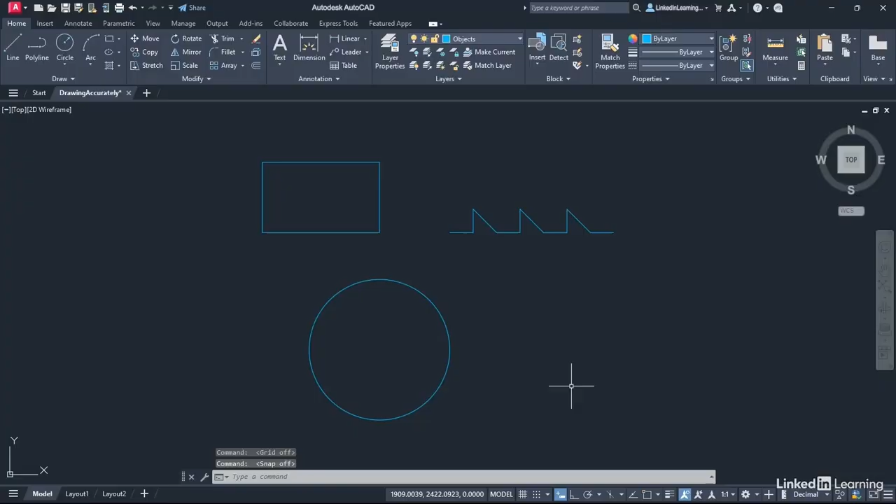Now, we're just going to do a little bit of housekeeping before we start using the coordinates in our AutoCAD drawings. First thing we're going to do is turn off snap and grid down here. So there's snap and grid, turn them off. They go grey on the status bar. Select the circle that you would have perhaps drawn earlier, and then right click and erase on the shortcut menu.

Now, we're going to draw a small circle on the end of this line here. So we're going to go up to the draw panel, click on the flyout, center radius for the circle, just pick a point on the end of that line. Now, at the moment, it's not snapping to it. That's because we need to come down here. We need to switch our polar, object snap tracking, and object snap back on.

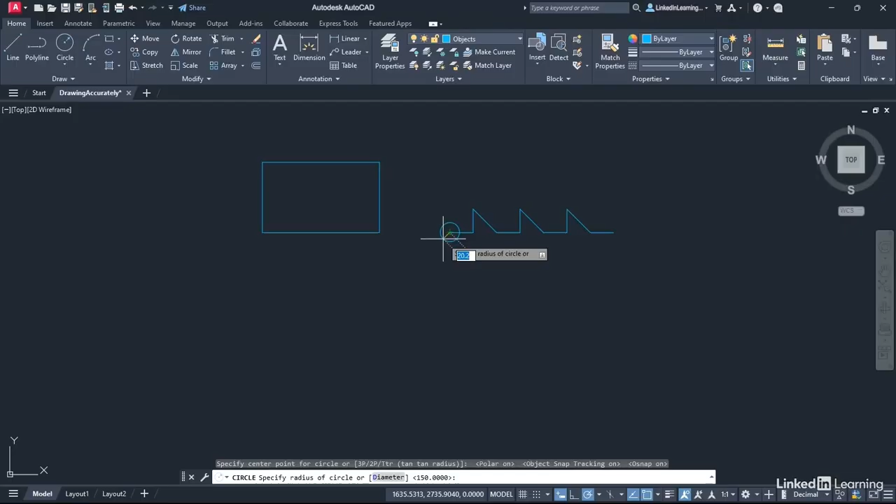Then if I hover there, can you see we get an end point? Left click. Just drag the circle out a little bit to about there, click there like that. There's our circle in place. Now the lines we don't need. So click on each line. You can do it individually like that. It won't take long. Just a quick click on each line. And once you've got them all selected, make sure the circle isn't selected. It's a right click and erase again like we did previously.

Now we're going to utilize the center of that circle for some coordinate entry to create a rectangle like this with 4 lines, but using coordinates only. So before we do anything else, we need to make sure that the center object snap is on. So we come down to the status bar, click on this flyout arrow here next to object snap, and we want endpoint, put midpoint on as well, and we want center, intersection, and extension. Make sure those 5 snaps are ticked.

So whenever you snap to an endpoint, midpoint, center, intersection, or extension, they will always display when you're working in the drawing. Now just click away from that in the drawing area, that menu will disappear. Make sure you're on the objects layer again in the layers panel, like so, and then go back to the line command, like you did in the previous video. And we're going to hover over the center of the circle, see it pop up, there you go, center snap, left click.

Now you can see our line is now moving freely. Grid and snap, you're kind of tied to those snaps on the grid. Now we're working in a much freer environment where we can potentially use the dynamic input there to put a distance and an angle in. But we're not going to do that. We're going to type the @ symbol. So I'm going to type @ like so. Can you see that appears on the dynamic input entry like so?

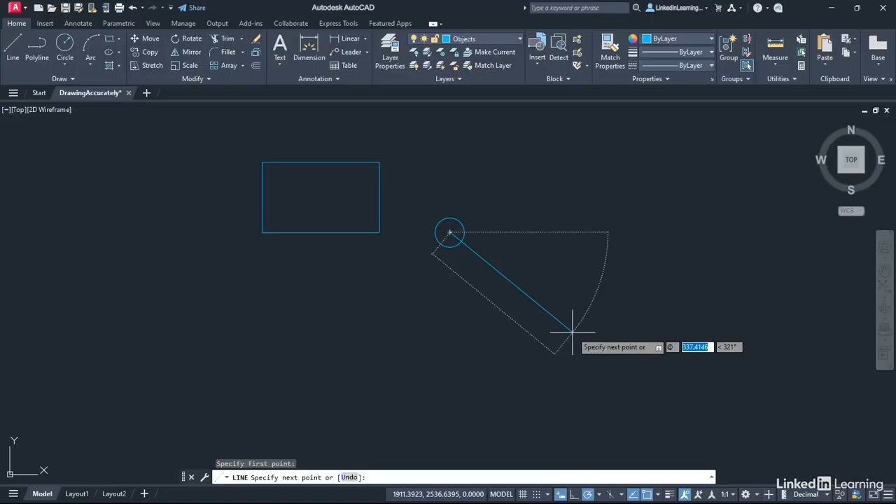And we need that to be 250 long along the x-axis, but 0 going vertically on the y-axis. So we're going to type in 250, comma 0. Now that line will go to the right because it's positive, and it will be horizontal because the y value is 0. Press enter, even though the line looks a bit weird, and you'll see there's your 250 long line. And now we're ready to come off of that segment there.

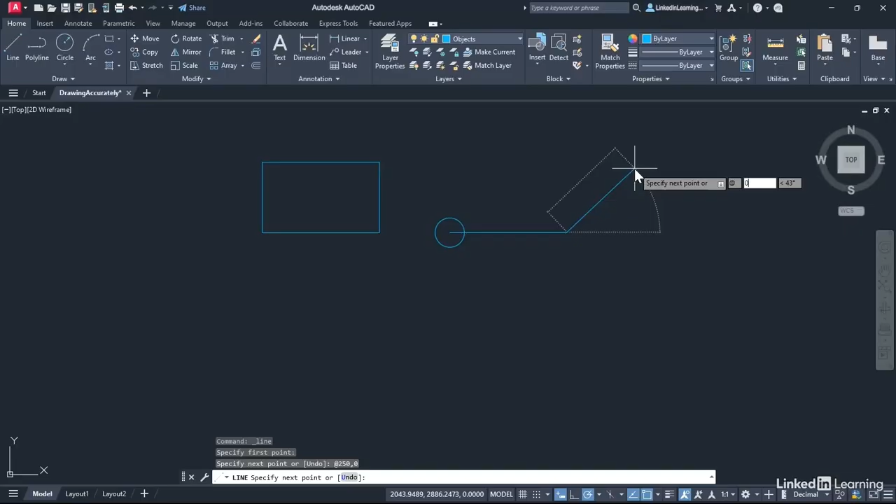Now we're going to do the same again, but we're going to use the y-axis instead of the x-axis. So this time it's an @ symbol again. This time 0 for x, type a comma, and then type 150 for the y value. So you're basically saying @0,150. Press enter to confirm. And there's your vertical line. So you've gone 0 along the x-axis this time, but 150 up in the y-axis because the 150 was a positive value. If you'd put in negative 150, the line would have gone downwards from that last point.

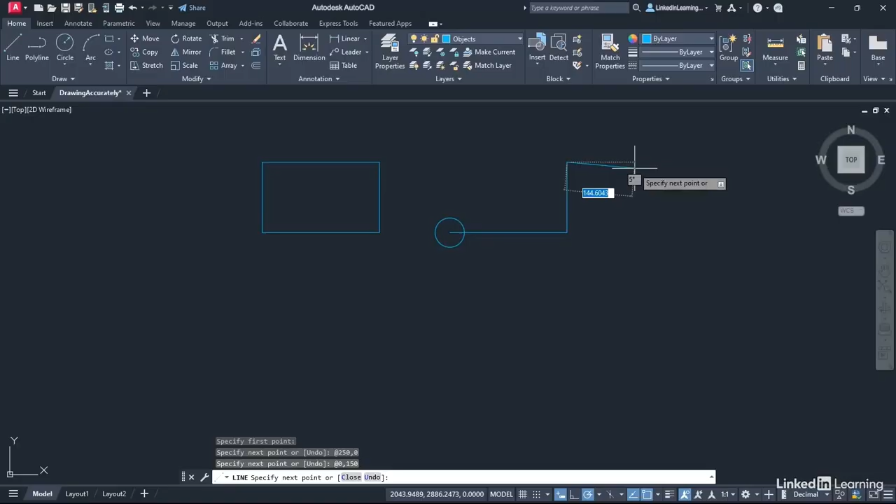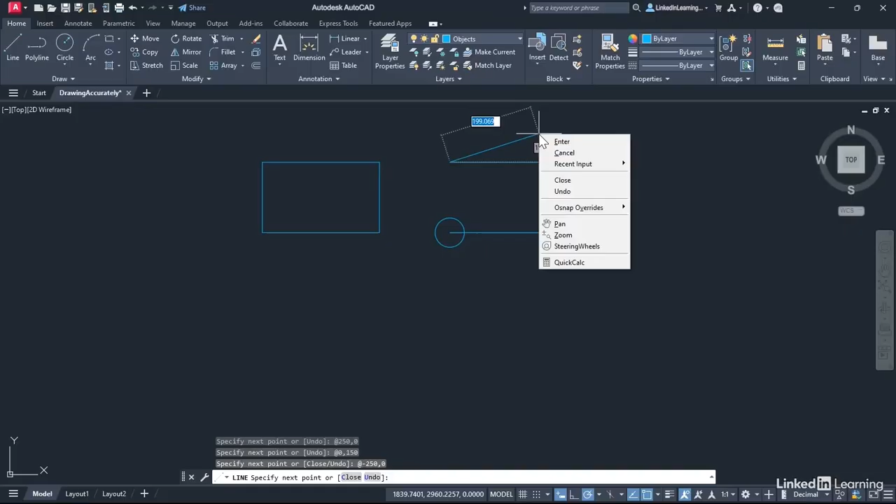So again, we've got to go to the left this time. So the x value will now be negative. So it's going to be @ again, but minus 250, going to the left, negative x, comma 0 in the y-axis. Press enter, and there we go. Can you see that's gone to the left? And now I can right click and use that shortcut menu to click on close to go to the first point. And there you go. We've created the same rectangle, but using coordinate entry instead.

So when you're using that @ symbol, that is relative to last point. It's a relative coordinate. If you were using hashtags in front of those coordinate values, that would be an absolute coordinate relative to x and y equals 0 at the origin. If you look in the bottom left corner of your drawing, can you see x and y with the little square around it? That's indicating that the origin is down there somewhere. What we've done is we've gone relative to the center of the circle using the @ symbol. Absolute coordinates, it's a hashtag. Relative coordinates, it's an @ symbol. So as you can see, fairly easy and quick using coordinates.

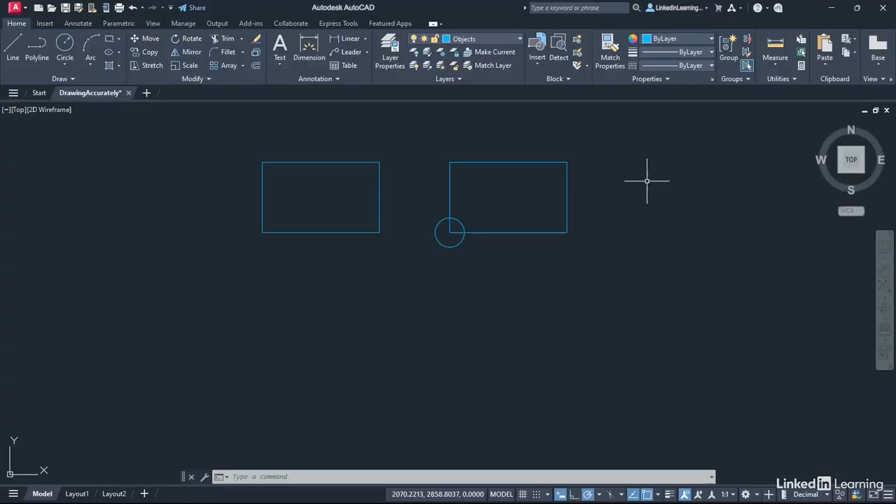Now, I suggest you go and look into coordinates in AutoCAD because there's not just regular Cartesian coordinates like that. You can have angular settings for relative coordinates as well. So you can put an angle as well as a distance in place as well. Go and check out coordinates in the AutoCAD help screens. It's worth a look and investigate them, and then you'll get an idea of how AutoCAD ticks and how the little motor behind AutoCAD calculates all this stuff that you're putting on the screen.